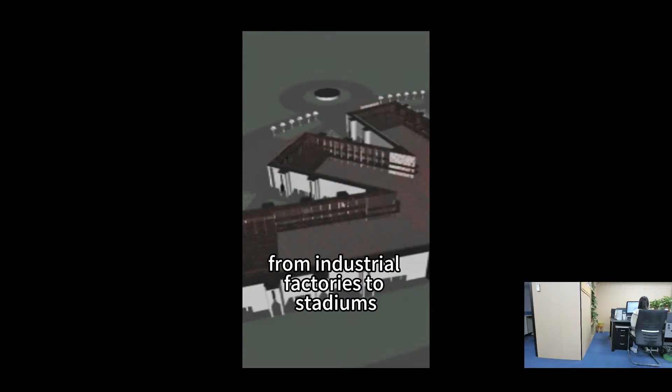From industrial factories to stadiums, from transportation hubs to cultural landmarks, LF has been deeply engaged in the field of steel structure and mesh frame for 30 years.

We believe that true architectural innovation begins with thinking about the nature of space, removing redundant columns, and restructuring the balance of force and beauty with precise calculations. Each design proposal is a redefinition of extreme span.

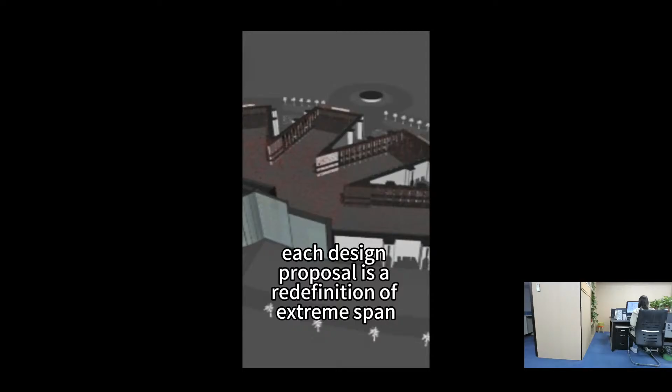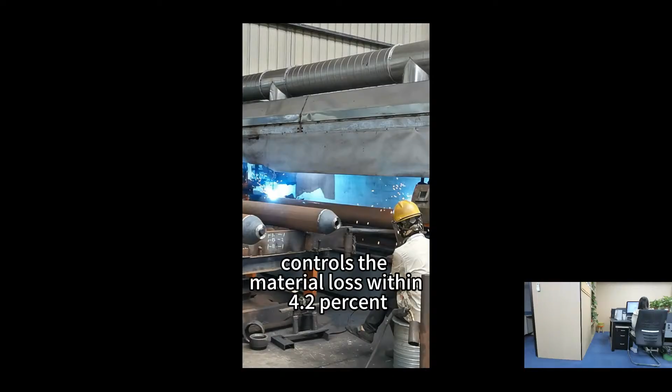The self-developed LBX node system has a bearing strength of 1.8 times that of the traditional process, and the BIM full life cycle management system controls the material loss within 4.2%.

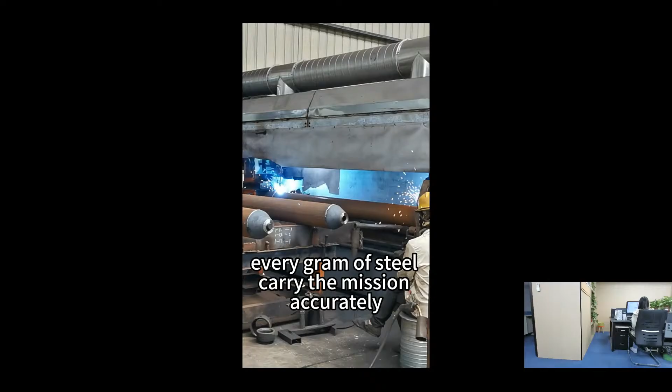This is not only cold parameters, but also our dedication to lean construction, to make every gram of steel carry the mission accurately, and to make every curved surface imply structural rhythms.

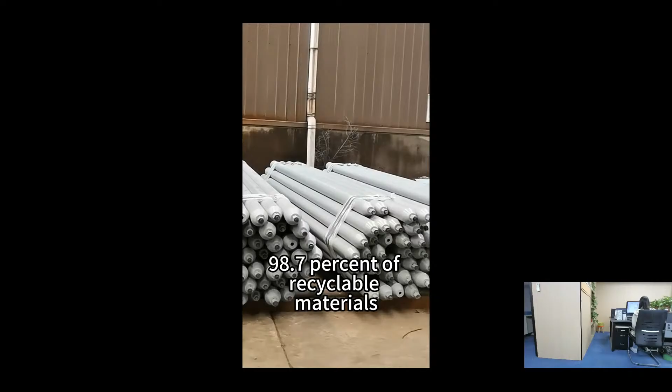When sustainability becomes a necessity, LF's green formula is rewriting the rules of the industry: 98.7% of recyclable materials, 30% reduction in overall energy consumption, and 65 years of full life cycle design.

We are proving that the toughness of steel and the gentleness of ecology can be symbiotic and co-prosperous. From conceptualization to operation and maintenance, what we build is not a simple supplier relationship, but a value alliance across the whole life cycle of the building.

217 landmark projects around the world, an on-time delivery rate of 99.3%, and a lifelong traceable digital archive. Behind these figures is LF's solemn commitment to architectural timelessness.

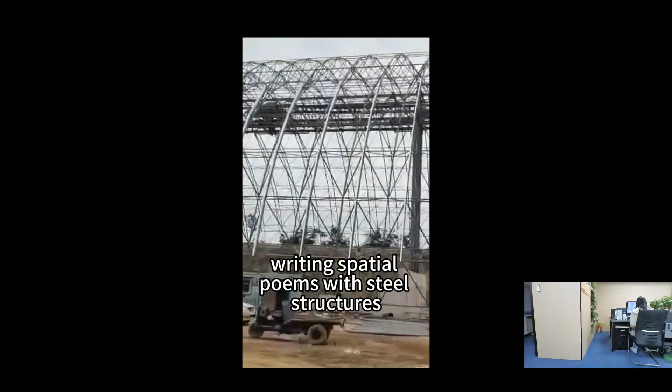When future architects look back on this era, LF hopes to be remembered not only for those record-breaking spans, but also for our consistent perseverance writing spatial poems with steel structures, and pouring eternal promises with the spirit of innovation.

LF is especially professional on large-span space frame projects, such as cold storage and cement warehouse in barrel or dome shape, etc. Comparing with traditional H-type steel structure, space frame with large span has more advantages such as more stability, beautiful appearance, and saving cost.

LF has been recognized internationally for its expertise in design and construction of space frame structure, domes and freeform structures, with all products compliant with sustainable building requirements.

Our products pass SGS, BV, TÜV testing and certification, as well as SGS provided welding process in line with the AWS evaluation. If the customer has other needs of documents and certifications, our documentation staff will further implement the cooperation.

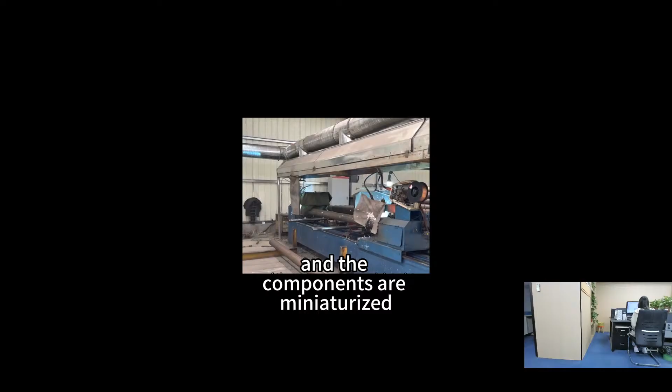All production is completed in the factory, and the components are miniaturized to facilitate transportation, avoiding welding and processing on site as much as possible.

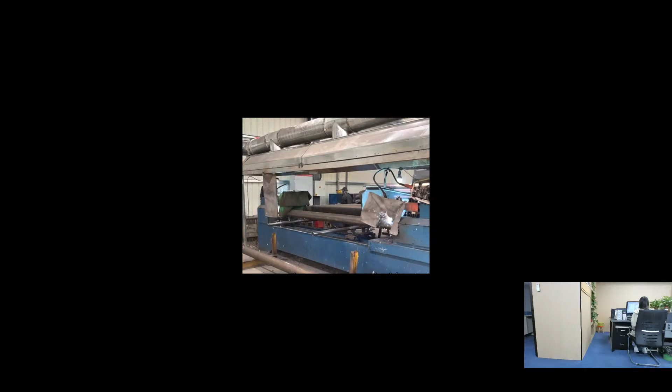Most of our products use bolting with a small number of welding or other treatment methods. The installation period is shorter, and the requirements on workers are lower. Factory manufacturing can avoid the safety hazards of on-site welding.

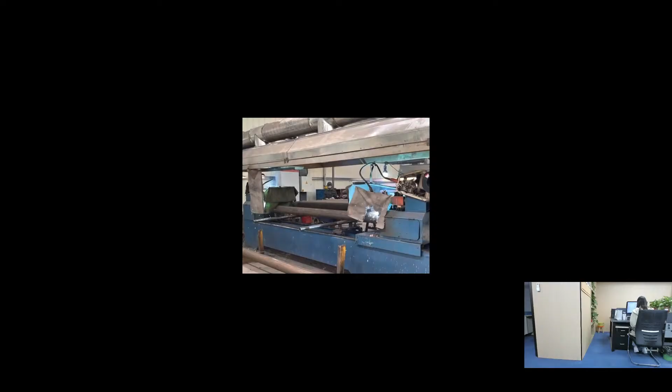Glass dome is usually made of tempered laminated glass, ultra-white glass and other high-strength, high-light transmittance materials with high transparency, good appearance, lightweight and other advantages.

The glass dome is able to change with the skylight, bringing natural and soft light into the interior while reducing the use of indoor lighting and air conditioning, saving energy.

Now let's look at some of the details.

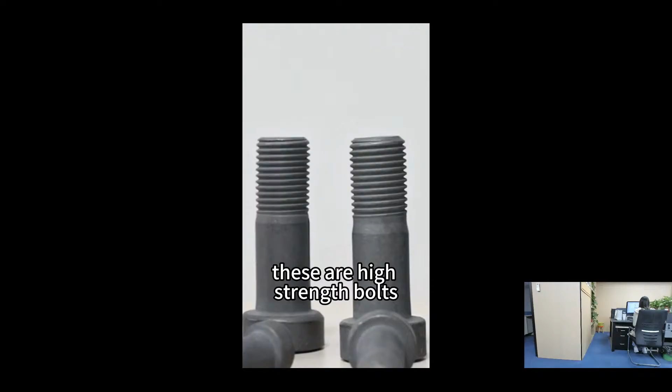These are high-strength bolts. The role of high-strength bolts in the space frame structure is mainly reflected in the connection fastening and enhancing the overall stability.

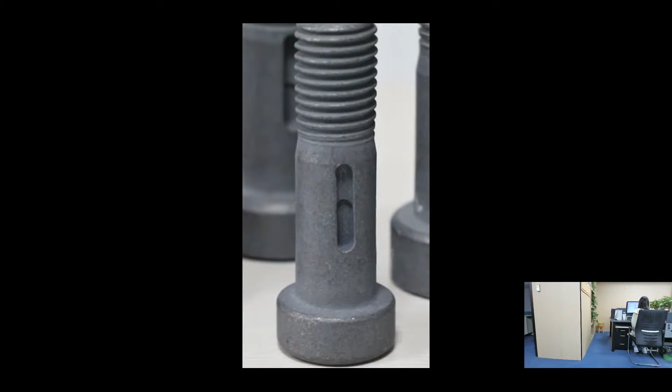These are sleeves. The sleeve is mainly used to connect the steel bar, connecting two or more steel bars through the sleeve to form an overall structure.

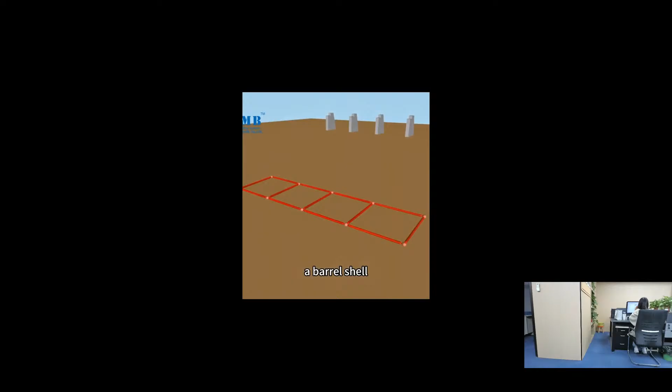A barrel shell is a shell with a barrel-shaped appearance or barrel-shaped structure. Shell is a kind of structural form with curved shape and thickness much smaller than other dimensions, which can bear large loads and has good stability.

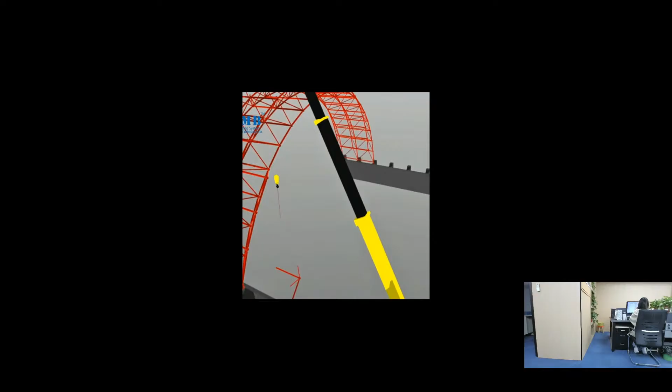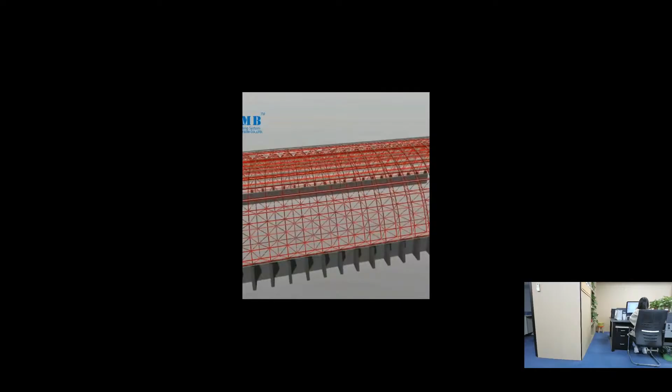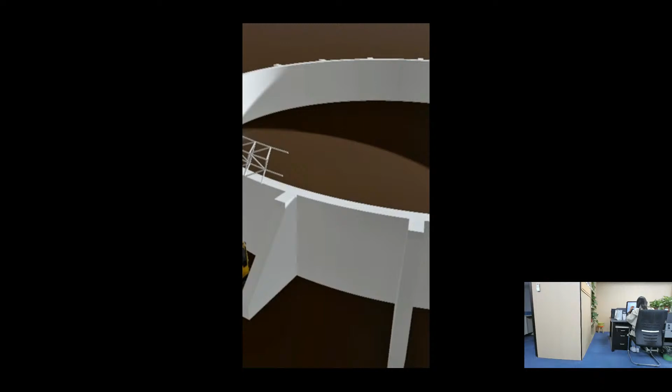The design of dome coal bunker makes full use of its internal space, with high section utilization rate, which can store more coal. In addition, the construction of dome coal bunkers is relatively simple, and due to its structural characteristics, it is also easier to maintain.

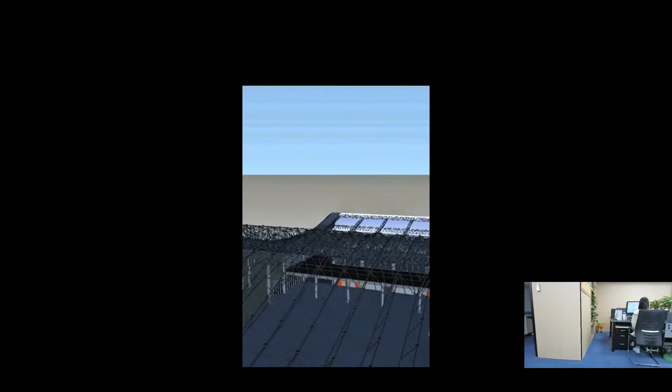The application of space frame structure in glass dome skylights is mainly reflected in its lightweight, efficient load-bearing capacity and aesthetic visual effect. As the dome skylight needs to cover a large area and bear a large load, the space frame structure can provide evenly distributed force transmission while reducing the weight of the overall structure.

Efficient load-bearing capacity, open space, and flexible design make space frame structures widely used in hangars. The space frame structure has a superior spanning ability, which enables a large span of space in the hangar without interference from columns, and facilitates the parking, maintenance, and operation of aircraft.

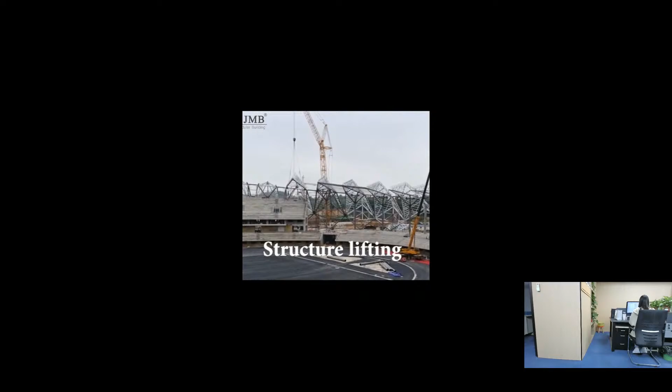Now let's take a look at Beijing Daxing Airport. The terminal of Beijing Daxing International Airport includes the main terminal, supporting service buildings and parking buildings, with a total construction scale of about 1.4 million square meters. The terminal covers an area of 780,000 square meters and has 100 boarding bridges. The terminal is shaped like a phoenix spreading its wings, presenting a unique shape of five-finger corridors. The terminal is topped by a circular glass dome, 80 meters in diameter, surrounded by 8 huge C-shaped columns that hold up the entire terminal roof.

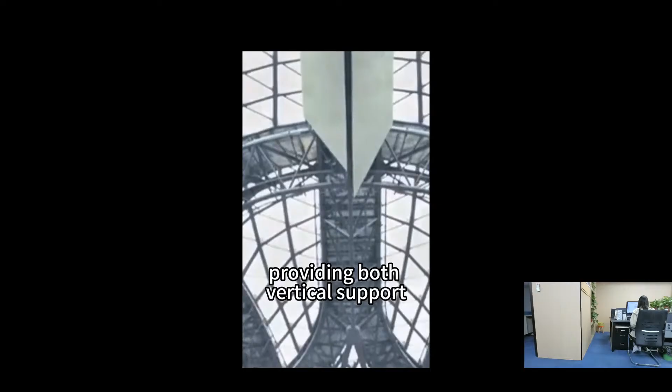These C-shaped columns are surrounded by bubble windows, which are mainly used for lighting and enable the terminal to withstand a Category 12 typhoon. The roof of the central area uses a steel space frame structure, supported by 8 C-shaped columns, 12 groups of support tubes and curtain wall columns, forming a large span roof of 180,000 square meters. The C column is the main support structure, and its unique shape and arrangement effectively transfers loads, providing both vertical support and horizontal stiffness.

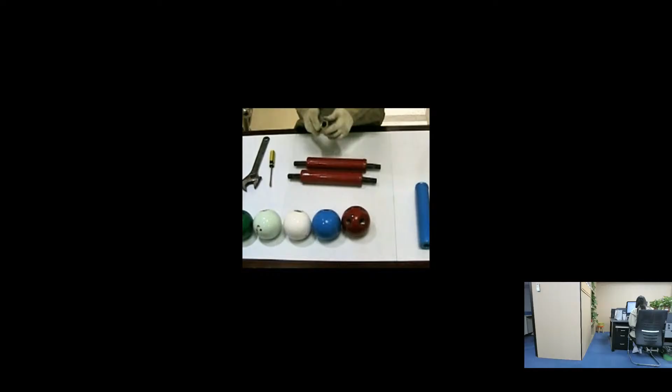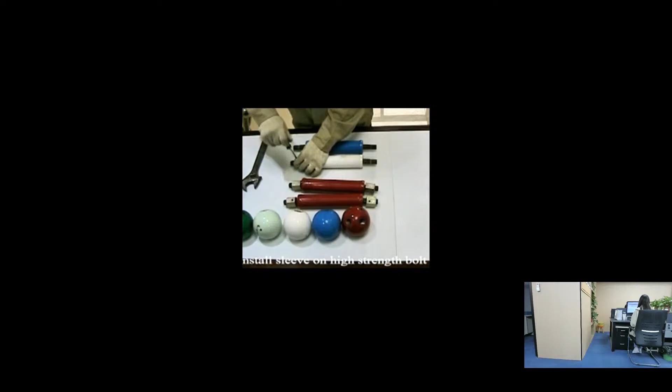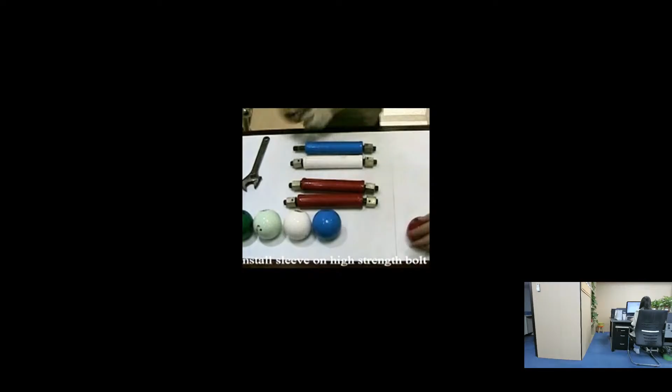LF space frame installation. Step 1: Preparation of space frame components. Step 2: Pull out high strength bolt from steel pipe. Step 3: Install sleeve on high strength bolt. Step 4: Combination installation of steel pipe and bolt.